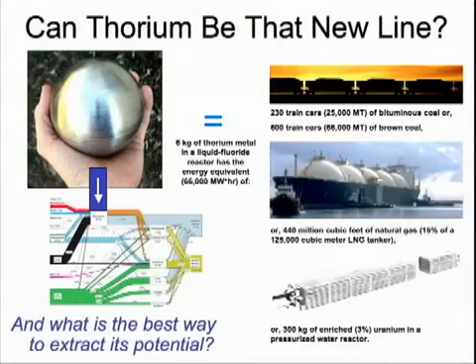Now, without getting into a lot of details, you can take a little bit of thorium, put it in a normal reactor, and you get some benefits out of it. But it's not an end-all, and it doesn't extract all the energy out of that thorium that you'd like to. And it doesn't mitigate all the problems you have with today's nuclear power.

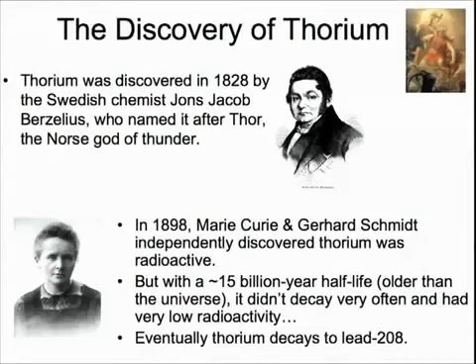Thorium, just for background, is an element. In 1828 it was discovered. It is slightly radioactive, with a very long half-life. That's why it's around. And it provides your background radiation along with uranium. Most of it comes from that—just a little bit of thorium that's always around in the soil and in rocks and minerals. The only thing I'll say here is that thorium is not really commercially used for anything much these days. It is a metal, with a very wide liquid range and some other interesting properties, but commercially it's not a big deal.

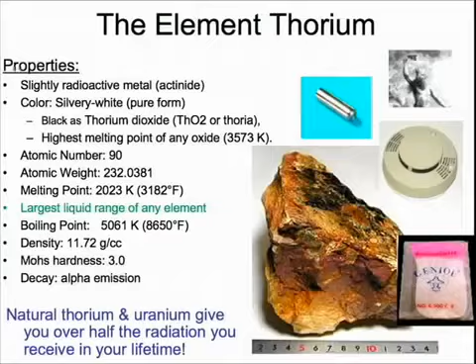Now, this is a log scale of what's available in the Earth's crust, and you see that at the beginning you have oxygen, silicon, aluminum. Down here at 100 parts per million, in this box you have copper in the middle. And towards the bottom, you've got lead and thorium. I expanded this little area out—uranium's about 4 times less than thorium. Boron, which some talks even at Google have discussed for fusion, is readily available. But what's interesting is the uranium you're really interested in, the one fissile material that actually splits, is way down here, orders of magnitude less.

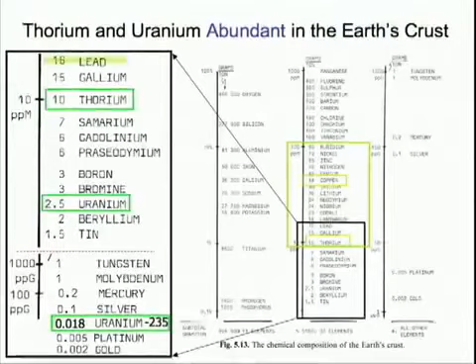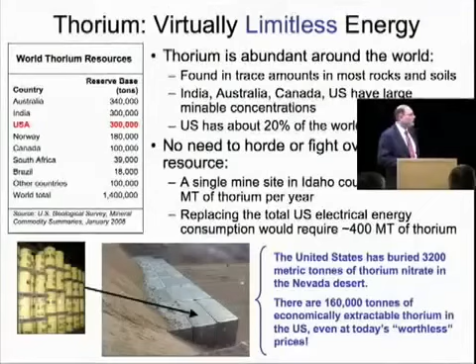So thorium, on a theoretical basis, the United States has about 20% of the world's reserves. To put this in perspective, if you replaced all the electrical energy generation in the United States that you saw before—and I'm not suggesting we do that, a lot of other energy sources will play—that's about 400 metric tons. One mine can produce about 4500 metric tons per year, which is 10 times that amount. The United States government has actually buried a bunch of thorium; they didn't know what to do with it. After paying for it and storing it, they just put it in the ground, literally, in these casks. You can imagine, even at this huge energy usage, that lasts 8 to 10 years. In a practical sense, this would last us probably 25 to 50 years, and you certainly have plenty of thorium available around the world.

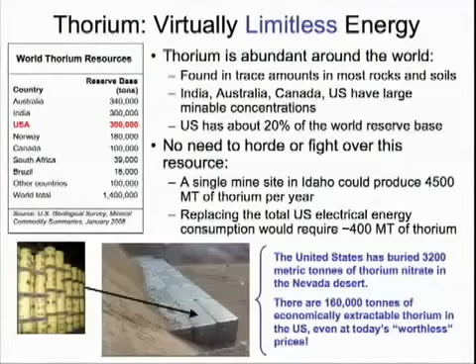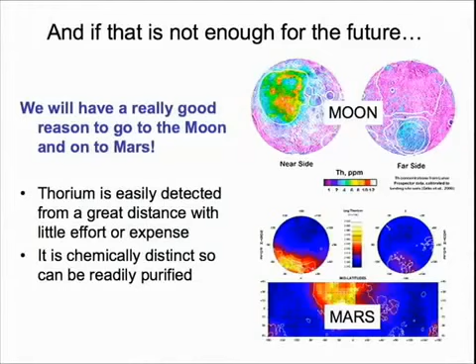That's not enough. Like fusion, we can go to the moon—the difference is we don't have to mine the entire surface looking for it. Thorium gives a nice signal that you can detect from space, so we can map it, and where the hot spots are, you know there's a pretty good thorium deposit there. Same with Mars. So we know it's out there in the asteroids—thousands of years worth of power.

Because of my systems engineering background, a little bit of the flavor I'm going to give you is in the vein of how do you select things, or systems engineering criteria. This comes from aerospace, that about 80% of a project's life costs and benefits are locked in the first initial decisions you make.

Nuclear doesn't have that. Now, to be very honest, one would have to analyze how much resources it takes to build a plant, and how much CO2 do I produce? In the case of nuclear energy there is some, but over the lifetime and the amount of energy a nuclear plant produces, it's probably fair to say it produces no CO2. But it's something you need to be honest about and compare.

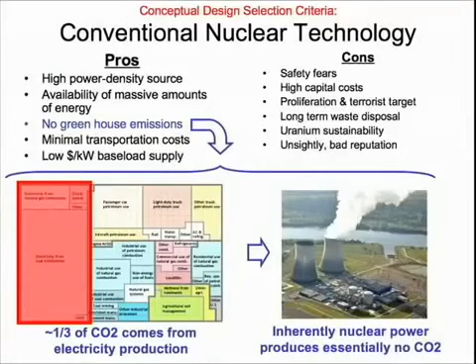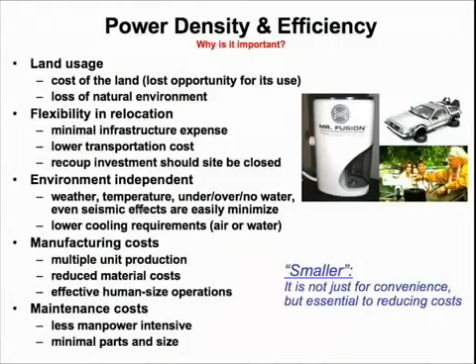Another thing in systems engineering is the concept of power density and efficiency. I can't go through all these, but obviously land usage, maintenance costs, anything you have to deal with, the overall cost over the lifetime of the project - smaller is not just convenient, it drives the cost 90% of the time. And therefore, at least the social cost, maybe not in a particular market, but across the board it usually does. You'll see that's very important for power density and efficiency.

An example that comes to mind is the cost of material, labor, and the distance from the end user, and all these other factors that factor in. I'm not going to go into big detail, this is information that's readily available. Natural gas turbine engines use about 1/10 the amount of steel, for example, compared to a nuclear plant, and a nuclear plant is actually pretty good compared to some others.

But you see in recent years what are we building? We're building these very expensive, difficult, gas-using machines that are pretty high-tech, yet we're building more of those. Why? Because overall, the resources necessary to produce that and meet the demand now makes you go for these things, and that's what's been happening.

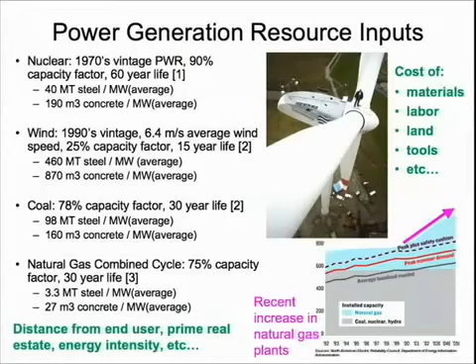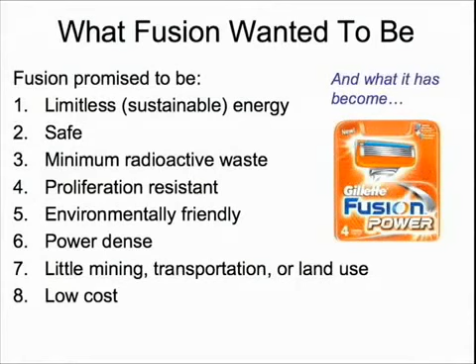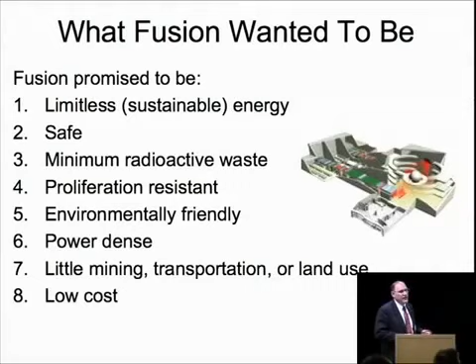So in light of what fusion wanted to be - safe, proliferation resistant, etc - that was one of the jokes. Today we have basically large plants, although there were a couple of Google talks about making fusion smaller. I would love that to happen. But basically we've got these very large plants, and of course they produce a lot of energy, but they also absorb a lot of energy in producing that energy. So your net gain is not as good as you would want.

Let's get into the history as well as the physics at the same time, and talk you through a little bit about thorium and why we ended up with the LFTR concept.

Three basic nuclear fuels - everybody should know uranium-235 is what's naturally found, that's what we can start with. These two have to come from fertile material, we have to make them, they're not found in nature.

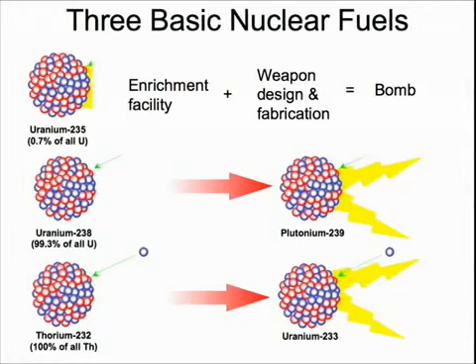In history, everybody was working on weapons, so you have an enrichment facility, you need a weapon design, you need fabrication techniques. For uranium-238, you need a neutron source, which also usually starts with uranium-235. You chemically separate, you need a new weapon design, new fabrication techniques, and you get a slightly better bomb. That's all I will say on that.

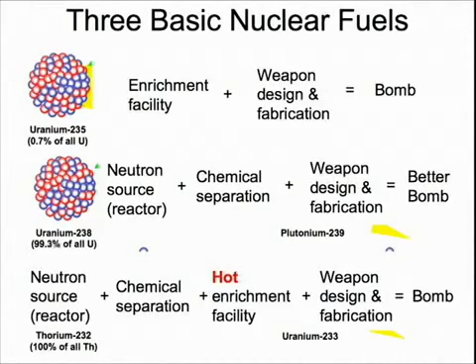And thorium - well, they discovered you need the same thing as with uranium-238, chemical separation, but then there's some contaminant in this, usually, so you go to an enrichment facility, but it's a hot enrichment facility. You need yet a new weapon design and new fabrication techniques to get the same kind of bomb. Well, obviously, these two are what the world has chosen to work on.

At the same time, most of the people that worked on those projects also were good people trying to say, what good can we do besides weapons? Electricity production was one of them early on, and they had the same problem.

They had the same materials to start with. You need enrichment or heavy water production, a fuel design—a little bit different, but still solid fuel, fabrication, and then electrical power.

I say short-term electrical power because at the time, they really underestimated how much uranium-235 was in the world. There was a little bit more than they originally accounted for. But at world usage, at U.S. levels, it's still a very true statement to say there will be peak uranium if you base everything on uranium-235.

Well, you can go with breeders. Fast spectrum breeder reactor—you need some sophisticated controls, we'll talk about that in a bit more. Some fuel design, and you get electrical power. But you also get a whole lot more production of plutonium, which can be used for nuclear power and run other reactors to produce electricity, or of course you can use that for weapons.

Thorium, on the other hand, looks a little different each time. Thermal spectrum, chemical processing, and you get electrical power. Very hard to get any extra out of it, and I'll explain that here.

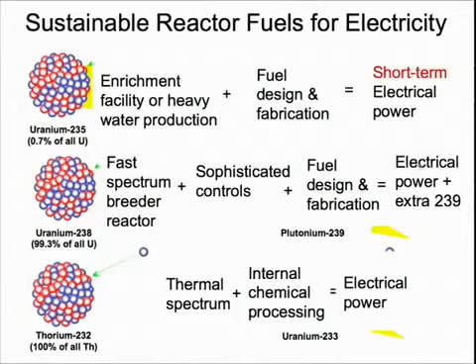Eugene Wigner at the time argued, well, that's great for weapons, but we really want to base our economy on thorium. It's more available, and more importantly, it runs on the thermal neutron spectrum, such that it's a lot safer, a lot easier to control. You can use these reactors—this is a very difficult reactor, a very touchy reactor to work.

But of course it doesn't produce much, because the average from the fission is only 2.5, and the actual absorption average is a little bit below that. So you're above 2, which is enough, but with real losses, you're not going to breed a whole lot of extra material out of this system.

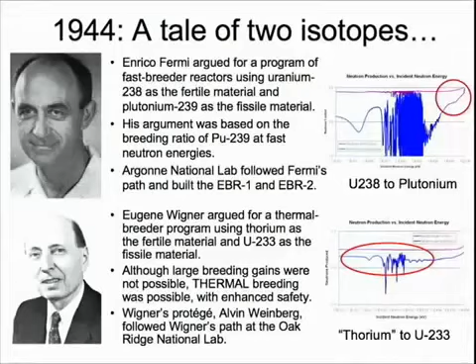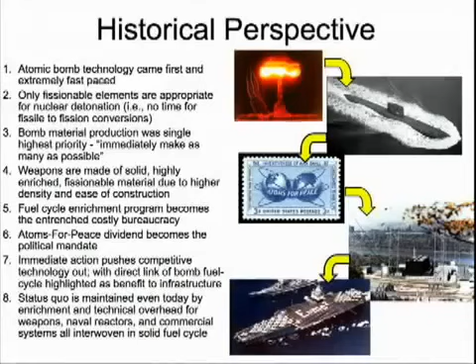Well, historically, what did we do? We went from weapons to the Nautilus. There was Eisenhower's Atoms for Peace program, trying to say, well, we spent all this money, we want to look a little bit better in the eyes of the world, let's produce electricity. But you're using the same infrastructure, the same people, the same needs and desires, you pour it into here. Shippingport was our first electrical plant, and sure enough, that is the base product for our surface ships. So a little bit entangled there—it wasn't exactly Atoms for Peace in a conventional sense of what's the best way to produce electricity.

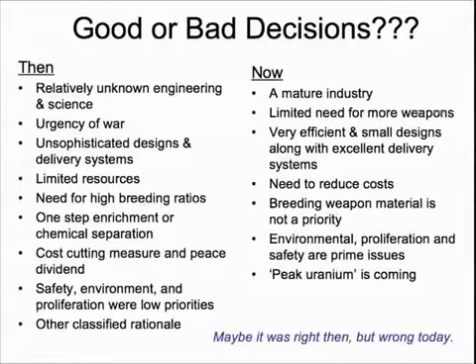Well, is that a good or bad decision? I'm not sure I want to debate that, but at the time, urgency of war, the fact that the weapons were unsophisticated designs, you needed a lot of material for it. The delivery systems were horrible, so you needed a large number to be a credible defense. Safety, environment, those kinds of things weren't considered as much, compared to today, with very efficient designs, ICBMs highly accurate, the need to scale down—we almost have too much material for weapons. Of course, safety, environment, and proliferation issues are the big concerns now. Maybe it was right then, maybe wrong today. People can decide that.

Well, in the tale of the nuclear reactor and thorium, engineers didn't want to give up. When they see a good idea, they dog it, even though programmatically and the money and the funding was completely cut off. They went around and said, look, Air Force, you don't have ICBMs yet. You need a credible defense to get your weapons out there, something that could fly a long time. How about this nuclear airplane?

Now, the only way this would ever work in a normal reactor is if you had a liquid reactor. And so they started a program. They sold the Air Force on it, as crazy as it is.

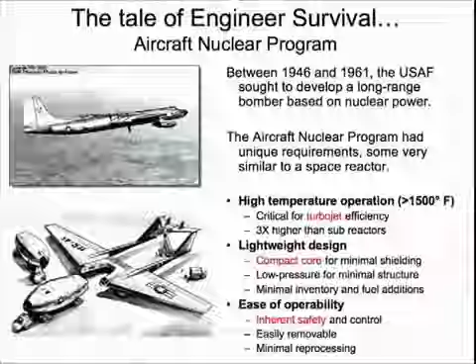And I understand that somebody recently has said something in England, I believe, about this. I would not like to see nuclear airplanes as our base of commercial flight. I can talk about that at some other time for the reasons for that.

But this reactor program started out, and they ran 100 hours at a high temperature. I believe that may still be a record, certainly for an overall reactor running that long, that hot - that's 1,500 degrees Fahrenheit, much hotter than most reactors can run.

Two things came out of this. One, the fission products were naturally removed as you were pumping it, which was really nice, getting rid of the poisons. And two, the load-following capability, which was essential for the airplane application - the fact that you wanted to throttle something without control rods, have instant response from the reactor, and then throttle back when you needed your power. This reactor in the fluid method was able to do that, unlike conventional reactors.

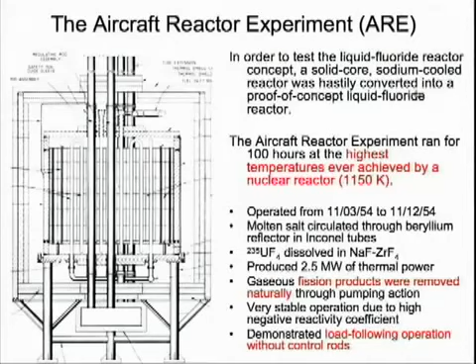Well, that program died pretty quickly as soon as the Air Force realized they could do the job much better with missiles. The missile program went full ahead, and that one was canceled.

The engineers still wouldn't give up, okay? They hunkered down at Oak Ridge National Laboratory in a small program, and they ran it from 1965 to 1969. The main thing I'll say about this, without going into great detail of the molten salt reactor experiment, was that they ran it 24 hours a day, three shifts every day, but none of the engineers wanted to stay for the weekend. So they shut it down Friday night and started it up regularly Monday morning - something that's not even thought about today in nuclear power plants.

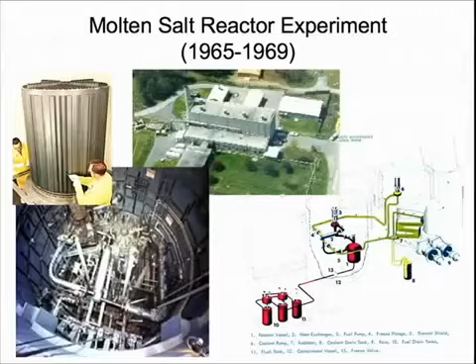It is a base load. When it goes down for a long time, you don't get to restart it.

Well, if this was so good, the common question is, why wasn't it done? Hopefully I've kind of hinted at that along the way. There's the establishment of the plutonium industry and the needs there. The fact that this is a liquid system is daunting - it's different than just nuclear energy. There's a lot of chemistry involved. There's an existing mindset that had to be broken.

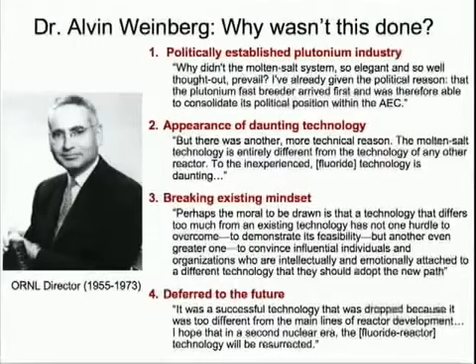And Dr. Weinberg, who also owns the patents for the reactors we have today, who helped basically train Admiral Rickover and suggested what the reactor for the Nautilus was, he worked on this reactor for a long time, hoping it would be the eventual power reactor technology used for electricity.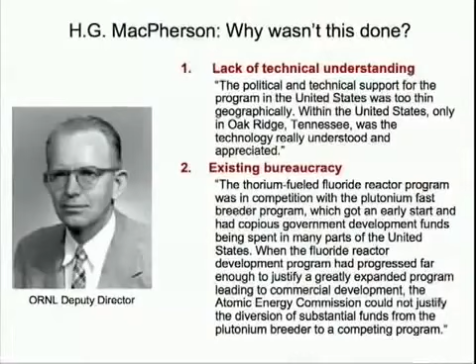Another person, in his memoirs - a deputy director at Oak Ridge - also pointed out that it was an Oak Ridge project, and therefore it was considered just their own pet project, and it was very hard to break out of that mold. Again, the existing bureaucracy. I've heard a lot of talks on fusion as well, the same kind of mindset where you're trying to break what the common large program has in the government.

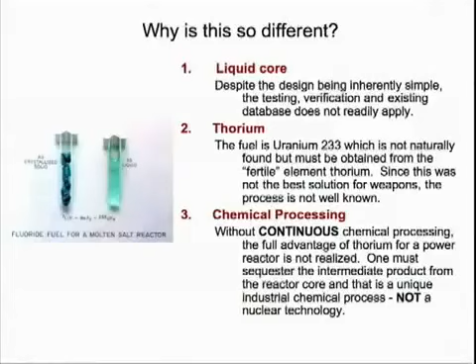All right, why is it so different? Liquid core, I mentioned that - the fact that it is thorium and that you have this chemical processing system. And you can see, at room temperature this is a crystal, it is a salt. When you heat it up, it becomes a liquid, a little bit thicker than water. You can pump it around.

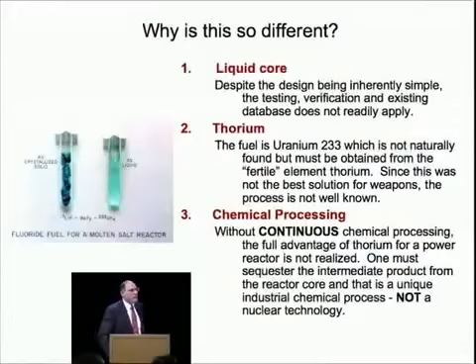Last thing on the history - Admiral Rickover, in his program, managed to put together a gigantic organization to build not only the Nautilus, but the whole nuclear navy. And it stands today - he's done a very good job as far as establishing a safety record. The Navy is excellent in that. But understand, inherently, it's not found in the reactor. It's found in the very strict rules, the blind obedience, the very well-trained, long-trained process that you have to do with the sailors that run these reactors.

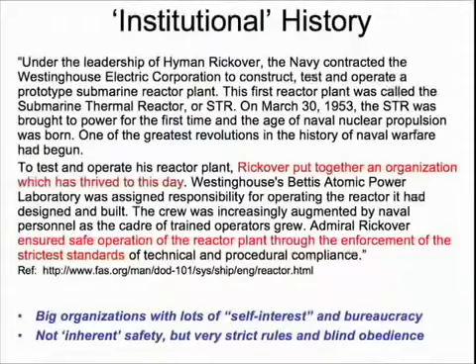So here's the path that we've taken - the typical nuclear reactor with this giant vessel. And the question is, have we made the best decision then, or are we making the wrong decision now?

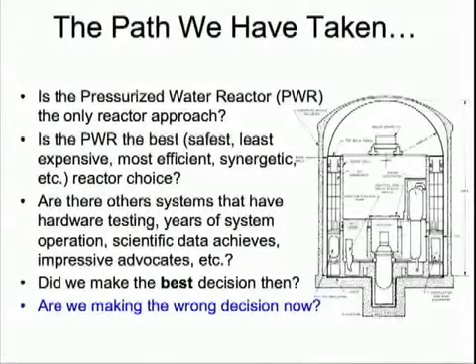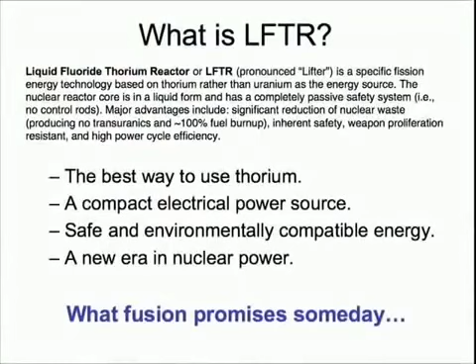I'm going to propose that LFTR is something that is what fusion promises. Some technical details: LFTR is a technology, or architecture of a technology I should say. It's not a specific design, but it has certain design characteristics.

Two fluids. The fact that it's atmospheric pressure, very low pressure on the vessel. It's going to be high temperature. It's going to have chemical extraction - I'll explain why that's necessary - thermal spectrum, and then the closed cycle Brayton system instead of steam.

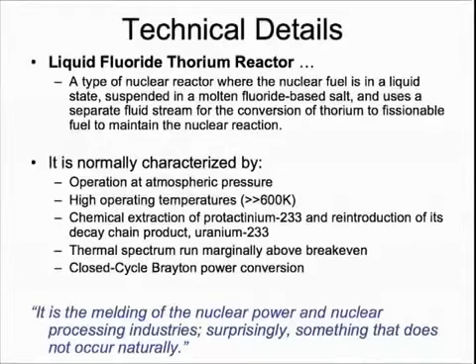The reason why we have to have extraction - this is the chart of the nuclides - is that thorium, with 90 protons, absorbs a neutron and becomes thorium-233, which beta decays in 22.5 minutes. Everybody know what beta decay is? It goes to protactinium. Protactinium has a 27-day half-life. It also beta decays and becomes your fissile fuel, uranium-233. That's what you want to get in your reactor.

Now, what if we leave the thorium, the protactinium, in the reactor? This is what happens: you get the same beginning, thorium beta decaying to protactinium. But now you have the problem of absorbing a second neutron, which is fairly highly likely, with a 7.5-hour half-life. It will also beta decay to uranium-234, which is not fissile.

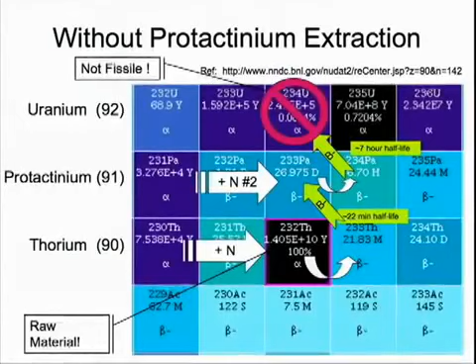Now, you could absorb yet another neutron here and jump to 235, and with another neutron, split the 235. But obviously that chain is using way too many neutrons, and the reactor would stop under those conditions. There's all these probabilities of absorption and other decay methods you have to take into account. So that's the main reason why you want to take the protactinium out of the reactor.

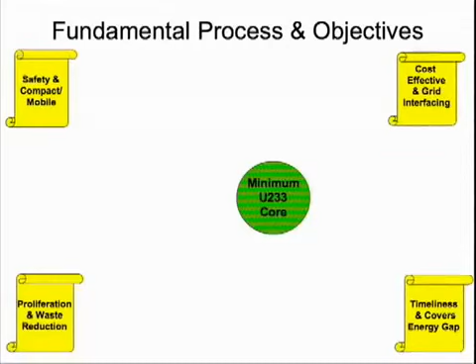So the architecture for LFTR starts out with the minimum core of fissile material that's hot. The four corners just remind you of the basic premise - what are the goals you're trying to get to: a safe, compact reactor, proliferation resistance, waste reduction, covering the amount of electricity you need, and doing it quickly, as well as cost-effective, connecting to the grid.

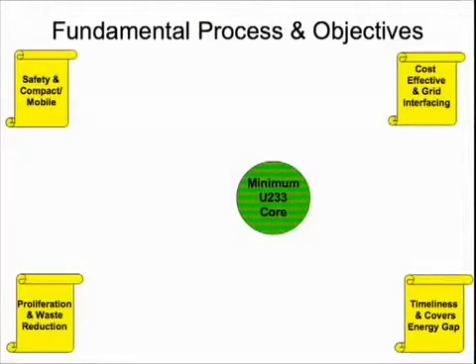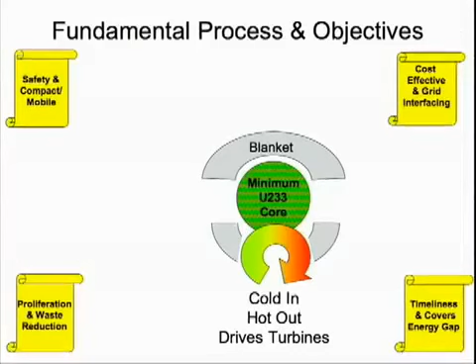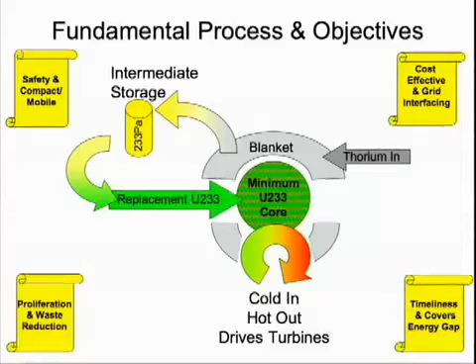So the core is just hot. You can pump it in and out, it drives the turbines. The blanket around it reflects the neutrons back in, or the thorium that's in the blanket absorbs and becomes your protactinium. You have to take out the protactinium - here's the chemistry - and then let it decay, and that produces the U-233. You can actually extract the fission products and other things out of the reactor as it's running in this liquid state.

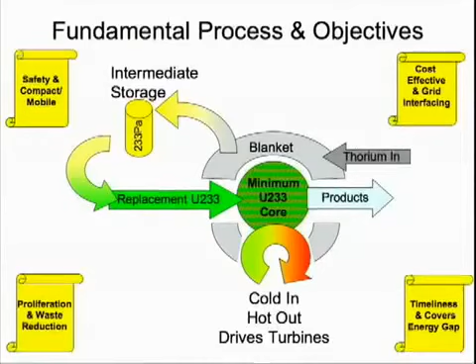So if we pick a couple of these, here's liquid core. You've got homogeneous mixing, which means you don't have any hot spots, which is a real concern in conventional reactors - one spot gets hotter, and it continues to get hotter until you have a meltdown. You get to burn up all the fuel because it's constantly being moved around in the reactor, and no fuel shutdowns because you can fuel this continuously. The expandability of the fluid gives you a large negative temperature coefficient, which is where your safety is at.

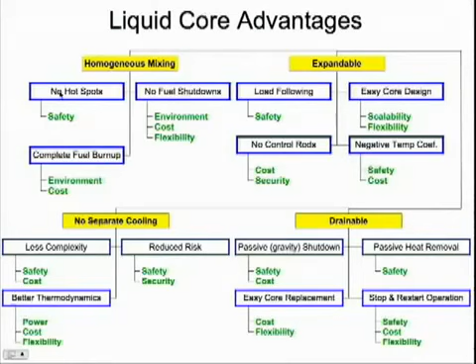No separate cooling system - that's one less system. And the big thing is the safety, the fact that there is no coolant to get rid of in order to have a meltdown or a problem. And of course, drainable - I'll give you an example of that.

If you have this very small reactor core and you leave a tube out there, and this is very hot liquid, as long as you keep that at room temperature by blowing some air across it, or in this case forced helium tubes, that salt will freeze and make a plug. If you got a crack in this thing, it will leak out and probably seal itself, depending on the design. But the point is, if you lose power, if anything happens, somebody throws a grenade in this thing, or if this gets too hot for any reason, that plug will always melt and drain into a passive pan, which can hold the heat and the radiation.

If everything's okay, you just heat it back up and turn it right back on in its liquid state. It takes a little while for that heat to dissipate before you can pump it back in and start up. So instead of being really cautious about shutting down your reactor because you'll black out half the neighborhood, and it taking days or months, if not years, to restart, you can go ahead and shut things down, realize it was just a mistake, and immediately go back online. So there's actually an inherent safety there because you can use your safety system all the time.

Actually, I need to go back. All right.

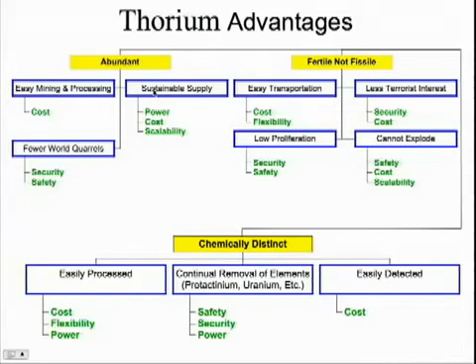Look at the uranium cycle compared to the thorium cycle. You start out with a whole lot more mining with the uranium cycle. You have a whole lot of yellow cake that you make—everybody recognizes that—but then you've got to enrich that and make these pellets. It's a very expensive process, and the security to do this is very expensive, much less the actual process itself. You end up with a whole bunch of depleted uranium, still useful in some ways and not in others, so I don't know what people are doing with it other than letting it sit on the ground. It doesn't go to Yucca Mountain.

You need a very big plant, as I showed before—a very large reactor with a vessel that can hold up all the steam or any explosion that can happen because it's very high pressure. You need a big turbine plant next to it, and you produce a whole lot of spent fuel, requiring Yucca Mountain for 10,000 years. The thorium cycle only needs 1 ton.

This is for the same amount of energy, 1 gigawatt for 1 year. It's a much smaller plant, low pressure. The Braytons are much smaller, much more efficient—as much as 50% efficient or better, compared to about 35% best you can do for steam.

With 1 ton of fission products, the big deal is that within 10 years, most of that—83%—is going to be back down to safe background levels. That means you can take those products produced in the reactor, and there are some very interesting things you can get out of that; you can sell some high-quality materials. The remainder only needs about 300 years for storage, which you can imagine finding many places around the world to handle, and you can imagine making storage caskets that last 300 years.

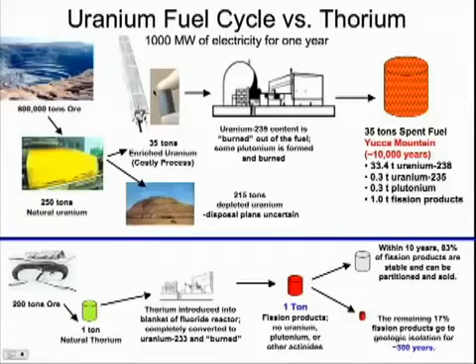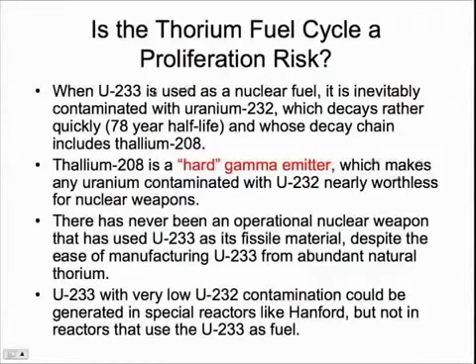On proliferation risk: one of the things that happens with this process, the thorium process as we see it, is there's going to be a little contamination of uranium-232. You just can't help it—I'll show you that in a minute. It has a decay chain that gets you down to thallium-208, which is a hard gamma emitter, making it very nasty stuff to deal with.

This is where the uranium gets in. The 232 undergoes certain reactions—I don't have time to go through the details. If you have 1% uranium-232 in the material and you're holding it, you have about 3 minutes, a little less than 3 minutes, before you get your full 5 rem dose, which is considered the top level. Within half an hour you're feeling the effects of radiation poisoning, and within 2 hours you're probably likely to die. So it's very hard to handle.

It also means separation: if a nation wanted to use this material for weapons, it would be a very hot enrichment environment to deal with. The radiation hurts the electronics as well as the explosive material within the weapon, so the bombs don't have a very long shelf life.

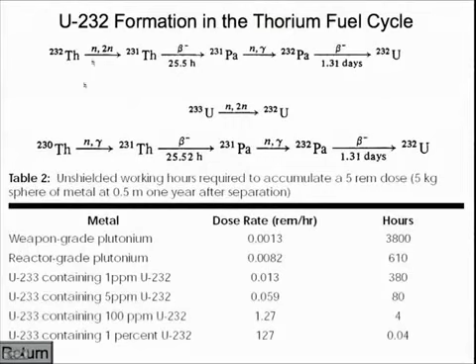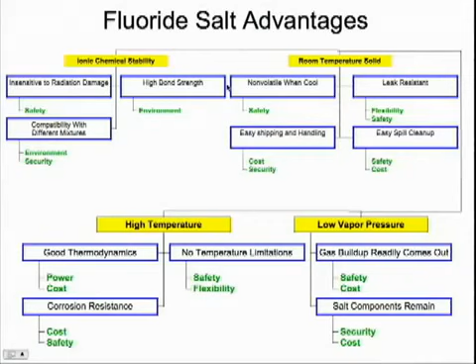On the fluoride salt itself, ionic chemical stability is very important, and I'll show that in a minute. The fact that it has very high temperature and low vapor pressure means you can run very high temperatures. Again, each of these things—room temperature solid, like I explained before, leak resistance, etc.—matters.

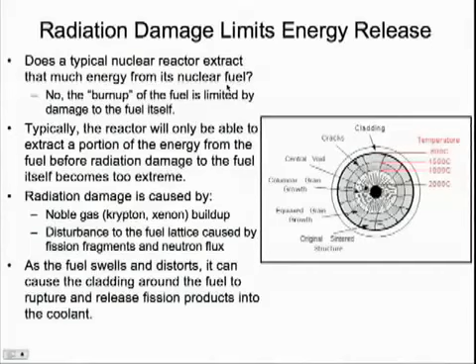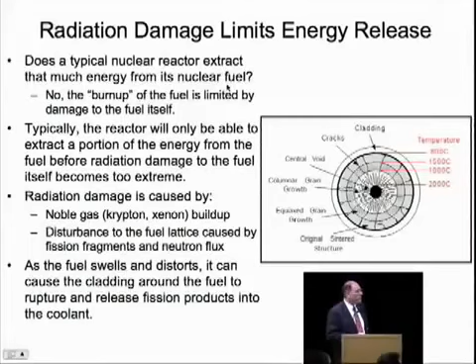Look at the radiation damage in a conventional nuclear reactor. It's going to have cladding, and all the temperature and heat builds up within that cladding, which can't break. Otherwise you lose the noble gases, the krypton and other radioactive things. So you end up having to pull out this core all the time and not burn up all the fuel, because there's physical damage being done to the solid.

Whereas if it's ionically bonded in a liquid, the ionic bonds don't care—they move around as they need to and reassemble, so you always have the ability to withstand a lot of punishment in the reactor.

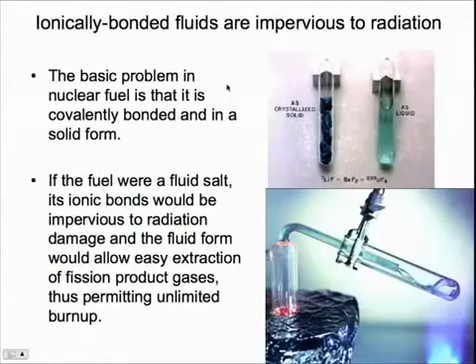For internal processing, we have minimal fissile inventory, so the reactor is small. There's no fuel fabrication, which obviously drives a lot of cost. A big thing is you can extract both poisons and valuable materials out of the reactor.

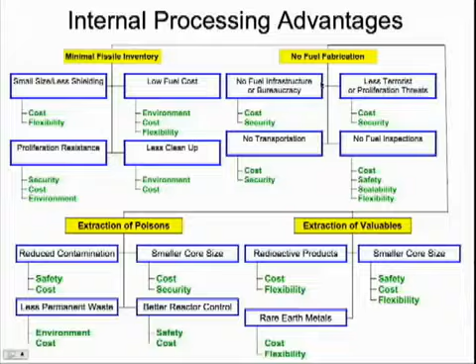You can do vacuum distillation to get out the fission products, and what's left you can separate further. This would probably take an economic analysis of how much time and effort you'd spend separating these things—do you do it at a central location plant, taking little bottles out periodically for central processing, or incorporate it like the actual breeding process within the reactor itself? This would all be self-contained in a reactor vessel.

The blanket, on the other hand, comes out, and I like to think of it as a reactive extraction column. If a chemist were here, it's like a catalyst, but they say that's a bad word, so don't use it. Well, to me, it's a catalyst in nature.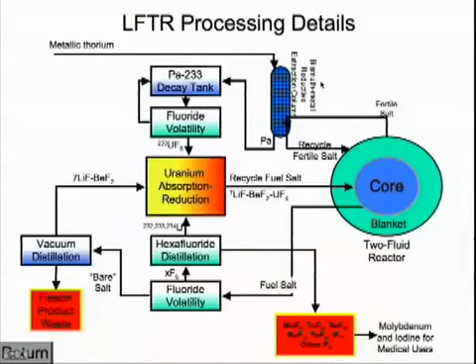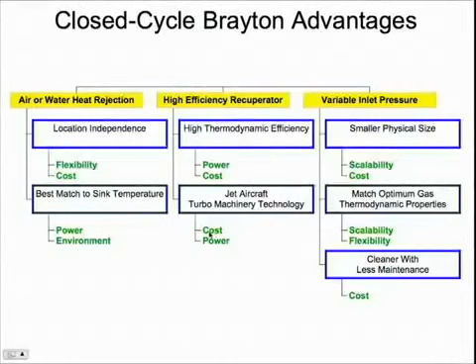Very quickly on the closed cycle Brayton system: it could be air-cooled heat rejection, as well as variable inlet pressure allowing you to play with the size and efficiency of the system.

This just shows the advanced boiling water reactor typically looked at—again, a very large building no matter how you do these things. The LFTR concept would be very much smaller. The whole reactor core would be something that size, with the entire Brayton system not much bigger.

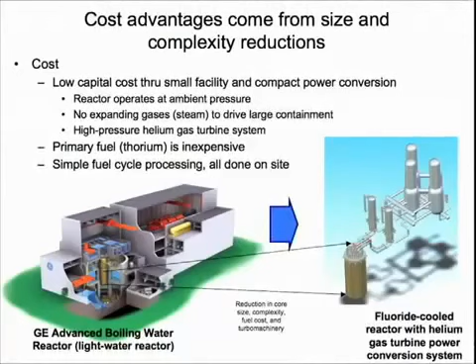This shows the difference in size comparing a Brayton system versus a steam plant, and some of the reasons why you'd think the cost of this whole system would be significantly less than existing nuclear power plants.

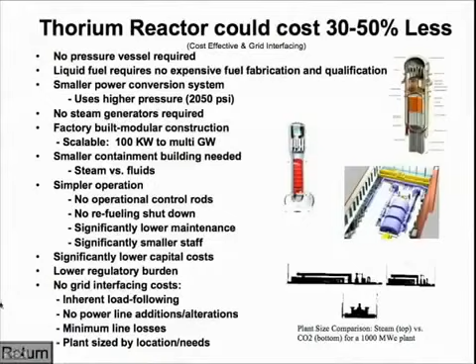Well, the disadvantages—I think I've explained some of these. It's unknown; it's going to be different from what the existing infrastructure supports. It does need a charge of uranium-233 or some other fissile material, but we suggest doing that because it keeps the whole reactor clean.

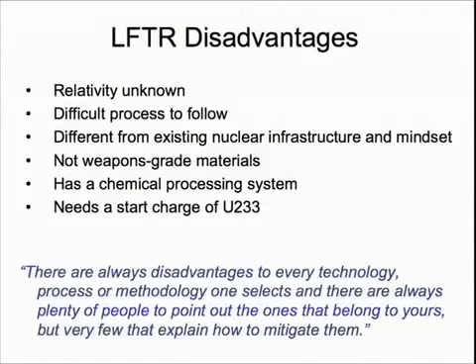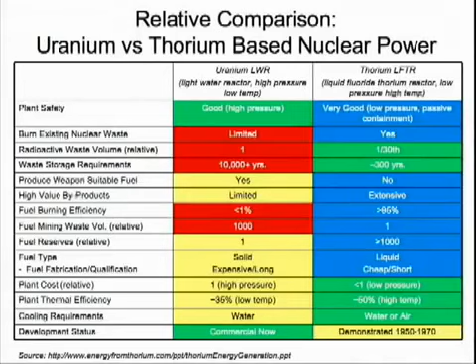Here's a comparison—I've covered most of these, everything from the relative waste, 1/30th, 10,000 years versus 300 years, the fact that you can burn almost 100% versus 1%. The best reactors are planning maybe 2-3% of total fuel usage, as well as being higher efficiency, lower pressure, air or water cooled.

And the unique applications—this should scale down as well as scale up if you want large plants, but it could also scale onto the back of a semi-trailer, that size typically. It would obviously be very advantageous to the Navy, because even in their smaller vessels they can't fit existing reactors into the littoral ships they have. We like to talk about submerged units because they're really not seen.

You can put them in rivers, and they're very small, very invulnerable to attack or other things. And if you really want to use other processes, high temperature directly from the reactor is very useful for, one is mobile, it can go to a site for shale oil extraction. It couples very well with desalination for water processes, hydrogen production as well, because of the high temperature nature of the reactor core.

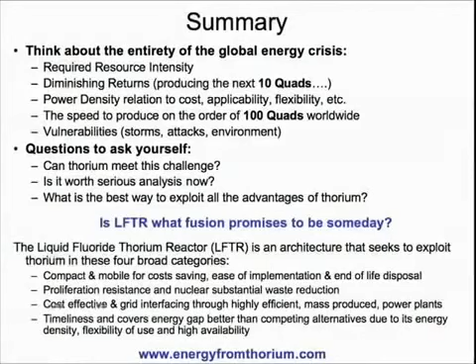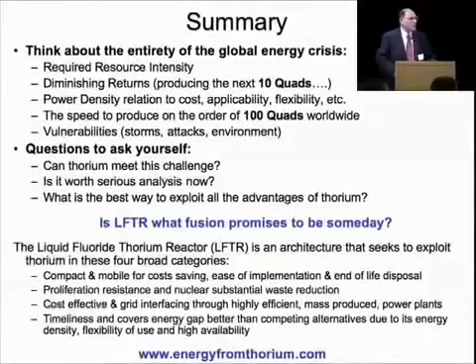So hopefully I've covered the brief background. These are the main things that we try to achieve with the technology. Those are the driving goals, and then how you actually put the reactor together, the specific details are driven by what you're trying to get out of it. The primary reason why most people look at thorium is because of the unique nature of being able to produce a huge amount of energy for a very small amount of resources per megawatt being produced, and can readily be put together fairly quickly.

So at this time, I'll take questions.

The U-233 that's re-injected in the core, how do you keep the 232 out of it? It seems that you introduce 232 and it's something you don't want to go anywhere near. What happens to the core when you introduce the 233 and the 232 in the reactor core?

Well, first of all, a reactor, any reactor, is very, very hot. You can't go near it. It's going to have a lot of radiation going on. So adding the 232 in there is not making any significant difference in the overall radioactivity in the core itself. Technically, it is a small poison. It sits in there, but it's a very small trace amount.

It's when you take it out that, unless you separate it, you always have a hot uranium. And the difference is the separation is chemical separation versus the uranium-233, which is what you want for the weapon, and uranium-232, which produces this gamma all the time in its decay chain, has to be done with separation techniques that are more common to weapon development. Did I get the question right and answer it?

I was just wondering if it makes the design of the reactor more difficult, because the 233 is actually part of the process. So the materials you would use, for example, as part of the plumbing, would you run into problems if your plant becomes contaminated with some 232?

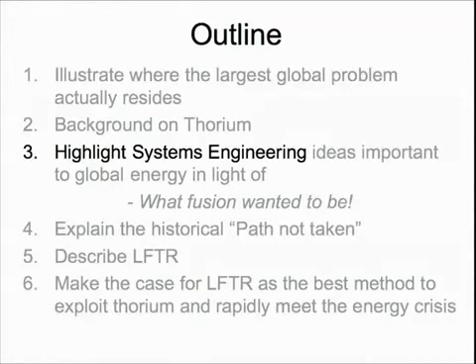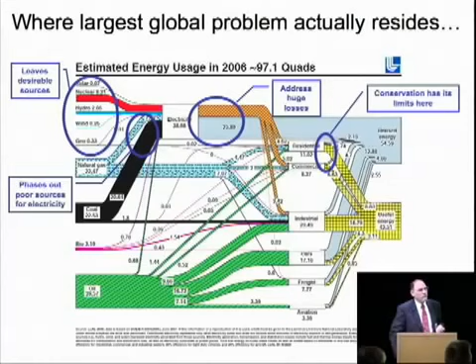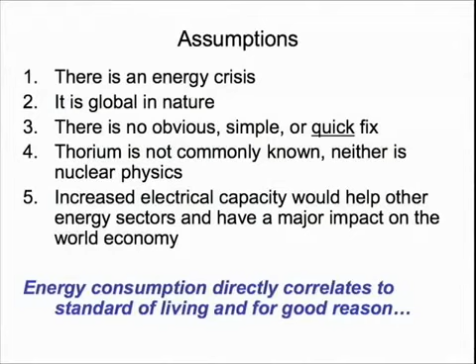Some assumptions. I'm assuming that most people understand the energy crisis. It's global in nature. Nobody's got a quick fix, at least nobody who agrees what the quick fix is. Thorium is not going to be commonly known, especially as an energy source. Increased electrical capacity is very important to the overall energy consumption. And the last thing is energy equates to the state or the standard of living.

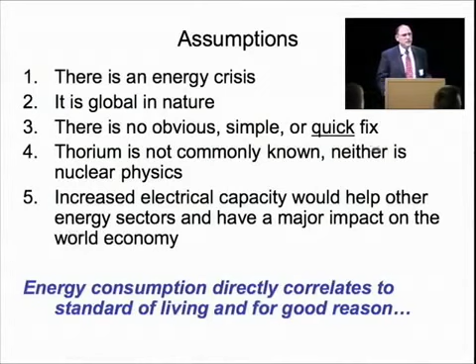And one of the last green energy forums I was at listening to, they equated it to 58 slaves, if you will, working full-time at hard labor, 365 days a year, for each person in the United States. And you can see that that level of energy is what gives us a standard of living.

This slide comes from Lawrence Livermore Laboratories. It's one that I would spend a long time on. I think it has a lot of great points to be made. I would just say that if you don't know what a quad is, 10 to the 15th BTUs, it's a lot of energy. And if you just take all the energy we have in the United States.

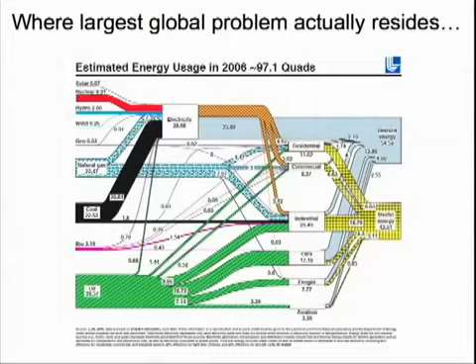Technology manager, lead systems engineer, nuclear specialist, and propulsion researcher. He's basically a rocket sciences guy. He managed the emerging propulsion technology area for in-space systems, the Marshall Air Launch Team, as well as a variety of other power and propulsion assignments.

After earning a doctorate degree in mechanical engineering from University of Alabama in Huntsville, he spent several years as a research scientist and senior research engineer at the UAH Propulsion Research Center, where he served as a principal investigator and manager for the Solar Thermal Laboratory. He has worked as a senior mechanical designer at Pratt & Whitney, supporting aircraft engine manufacturing, and at the Lawrence Livermore National Laboratory within the Laser Fusion Program. He's a graduate from the United States Military Academy.